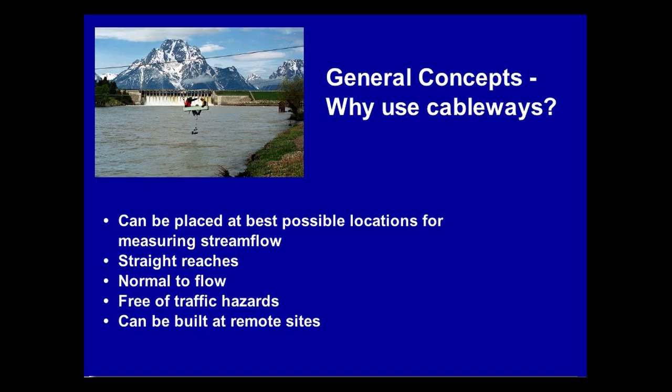The video that follows shows the uniform reach near the cableway on the Swan River near Bigfork, Montana.

The cable provides a track for a car from which hydrographers can make a current meter discharge measurement. The car is released from one end of the cable, and because of the sag in the cable, traverses part way to the other side. The car should slow as it proceeds uphill to the A-frame or anchor on the other side. The video that follows shows what a ride on a cable car is like.

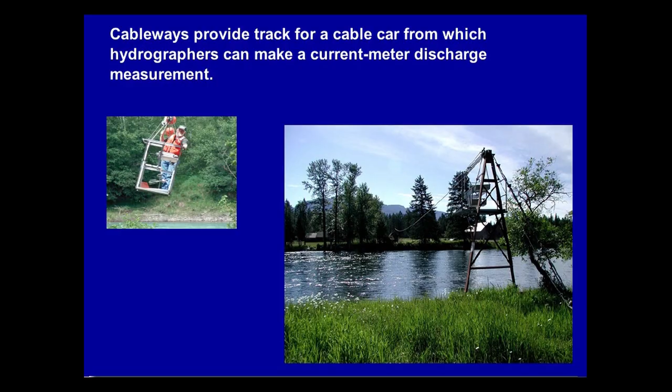Okay, we're about to start our measurement here on the Middle Fork of the Flathead River. Discharge today is going to be around 9,000 CFS. We've got a channel width of about 300 feet. I'm going to go ahead now and release the car, and we'll begin at the left edge of the water.

Two types of cable cars are in general use. Both cars have room for two persons. Stand-up cars are often more practical when spans are long and heavier sounding weights are used.

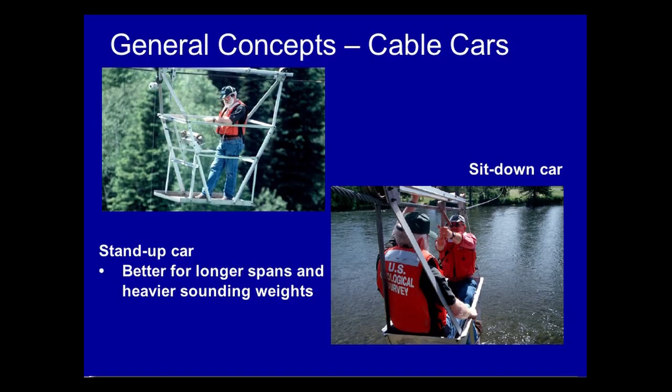Although some cable cars are moved using electric or gasoline motors, most are pulled along the cable using one of several styles of pullers. Pullers must be sized to match the diameter of the cable so they don't slip, and can be removed easily from the cable.

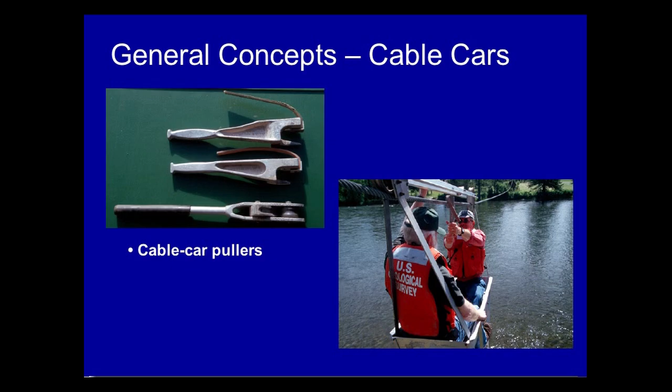The relatively new Sand Point brake, which is an effective way to slow and stop the car, is shown here. Also shown here is a car puller with a leather strap attached. The car can be allowed to slowly roll over this leather strap to stop and hold the car.

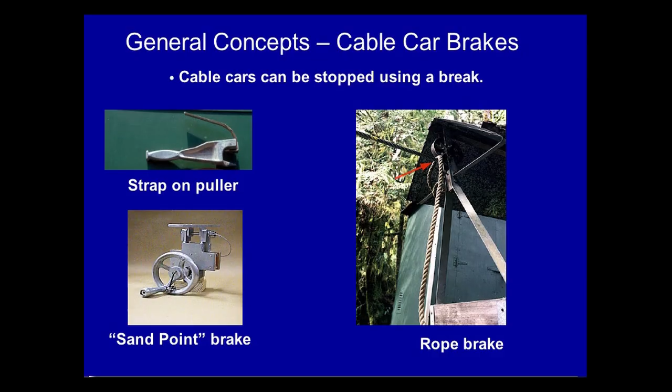The video that follows shows a third type of brake attached to a sit-down cable car. Where none of these systems are available, a rope blocked between a sheave and the cable can be used as a brake. Cable width is measured using marks on the cable.

Cables are usually marked in 5 or 10 foot intervals, with double marks every 50 feet and triple marks every 100 feet. When looking downstream, cables are usually marked starting at the left end of the cableway.

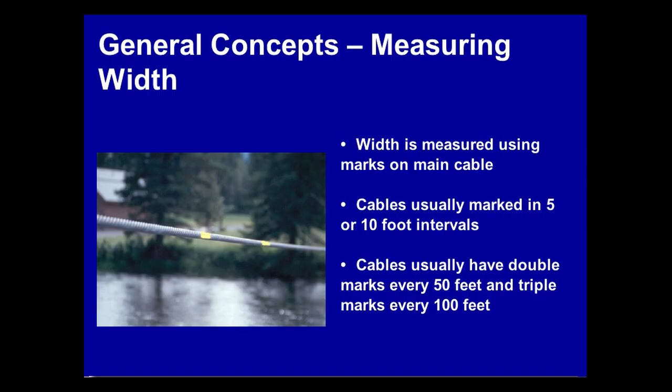You must keep track of the markings as you move across the cable. Marks should be regularly checked by stringing a taut tag line above the cable. Too much sag in the tag line may give incorrect distances between cable markings. The video that follows shows how cable markings are used to determine stationing along a cable.

Okay, we're going to move to our next station along the stream. Generally, this cable is marked in 5 foot intervals. We'll use 5 feet for our next station. We move until the sounding cable is directly under the next 5 foot reading. Set our brake, and we're there.

Now, if you need to get a reading, a lot of cables are only marked at 10 foot intervals. These holes right here are about 5 feet, so if you need to interpolate between, you can use these holes, or this bracket down here if you're coming from the other end. That's going to give you about 5 feet so you can interpolate between 10-foot or even 5-foot marks.

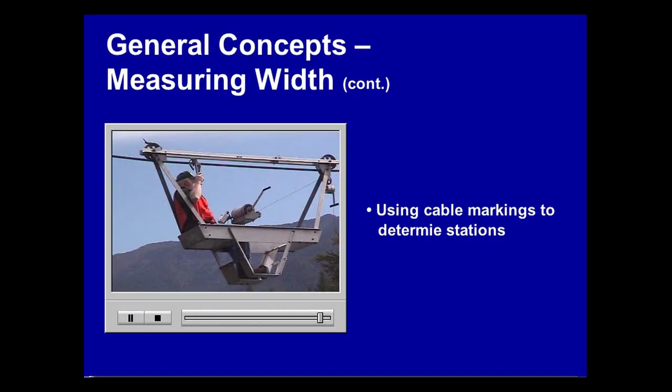Water depth is measured using a sounding cable attached to a reel with a depth indicator. Depth is generally reported to the nearest tenth of a foot.

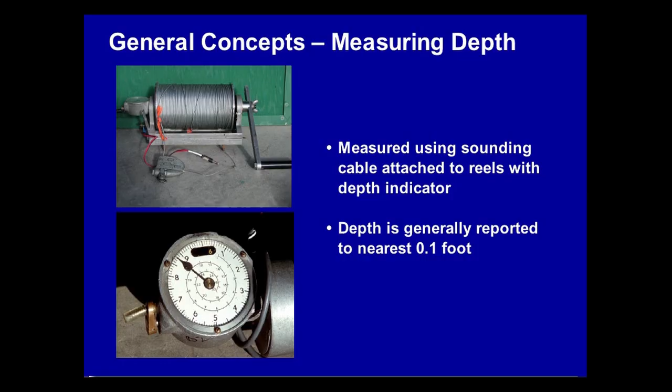Depth is determined by reading the dial on the sounding reel. Depth is usually set to 0 when cups or rotors on the current meter are centered at the water surface. The video that follows shows this procedure.

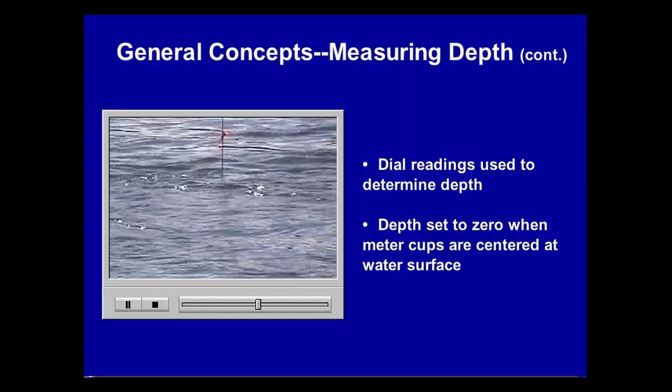Before we take our depth reading, we need to zero the dial on our sounding reel. One way to do that is to center the meter cups at the water surface and set that reading to 0 on the dial, then begin to lower your weight down slowly until you hit the bottom. Once you hit the bottom, take your depth reading on the dial, add the 1 foot for the distance the meter is above the bottom of the weight, and that gives you your total depth.

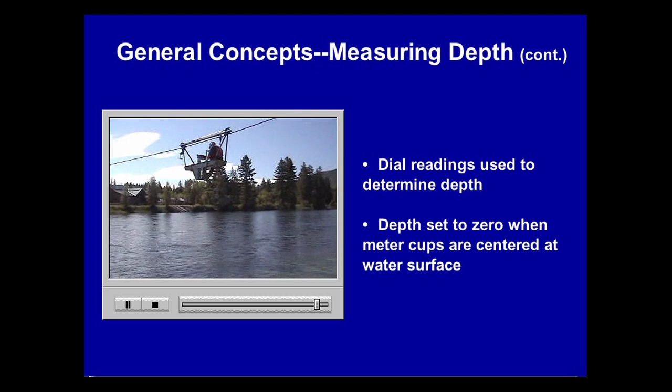You should sound the bottom carefully to avoid incorrect readings. The weight should be lowered gently onto the bottom and not allowed to scour into the stream bed before you read the depth. The video that follows explains these concepts.

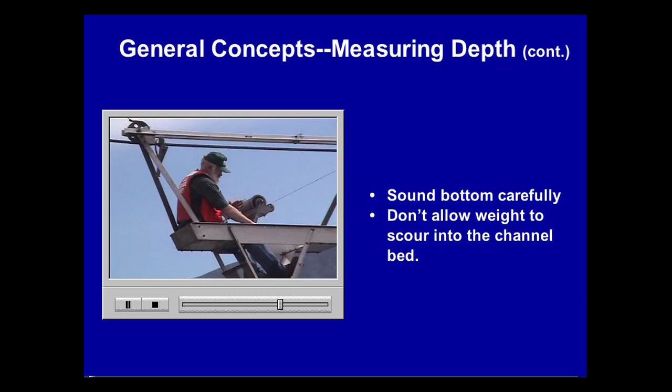Lower the weight until I hit the bottom. Now at this point, I'm showing 3.6 feet. What I want is to take my reading as soon as I feel that bottom. On this stream, it's kind of a luxury, I can test and see where the bottom is because I've got a good hard rocky bottom here. A lot of streams have a soft bottom, especially sand channels, and as soon as you hit that bottom, it's going to start to scour out under that weight. If you hit it too hard or hit it more than once, you're going to get a false reading for your depth. So I get my depth now at 3.6 feet.

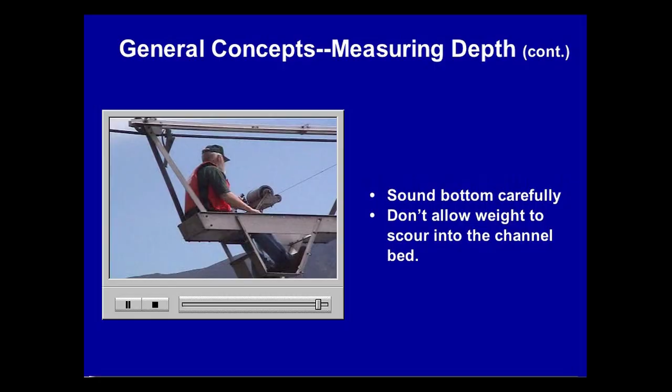A heavy enough weight must be used to ensure that the weight will reach the stream bottom and not be dragged downstream. A rule of thumb is that the weight in pounds should equal the product of the maximum depth in feet times maximum velocity in feet per second.

Despite your best efforts to use proper weights, the sounding line is sometimes dragged downstream when it is lowered into the water. This is more likely to happen in deep, swift rivers. When this occurs, you will have to consider applying a wet line and a dry line correction, because the length of the line let out from the reel will not equal the true depth of flow.

The video that follows shows a weight being dragged slightly downstream.

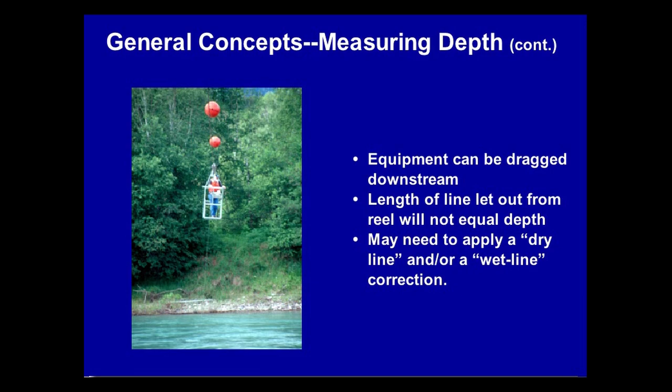You can see as the weight is lowered, it's dragged downstream just a little bit.

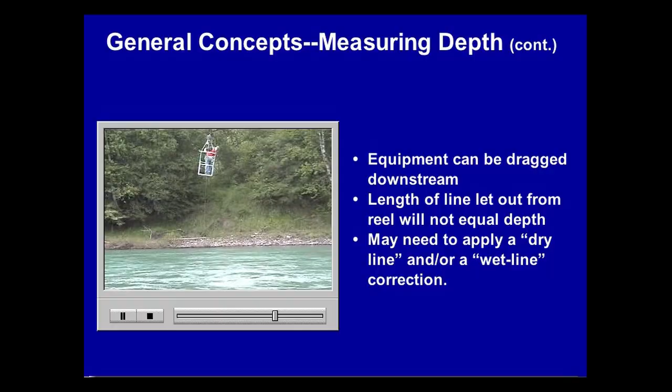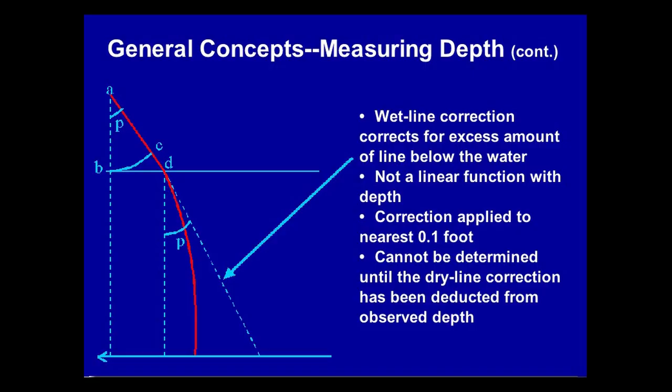A dry line correction is shown in this schematic diagram. It corrects for excess length of line let out from the reel above the water surface. A wet line correction corrects for the excess length of line let out below the water surface. It is a nonlinear function that changes with depth. You cannot apply the wet line correction until the dry line correction has been applied. Both corrections are applied to the nearest tenth of a foot.

To apply either a dry line or wet line correction, you must know the angle the cable makes from vertical. This is determined using a protractor mounted on the cable car. The video that follows discusses measuring this angle.

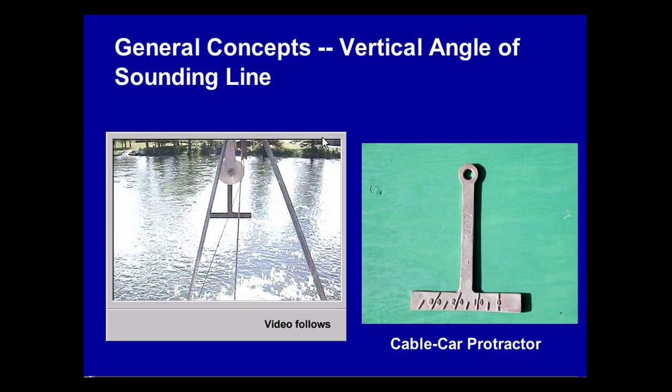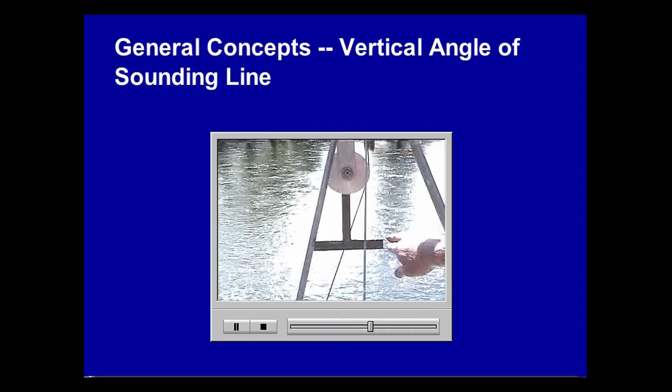Another thing that we need to watch out for is our drag downstream. We use a protractor on the cable car to read the angle and give us our wet line correction. You can see here we're being drawn downstream to an angle of about 20 degrees. We'd look that up on our wet line correction table, and that will give us a correction for the incorrect depth we're getting by going down at an angle.

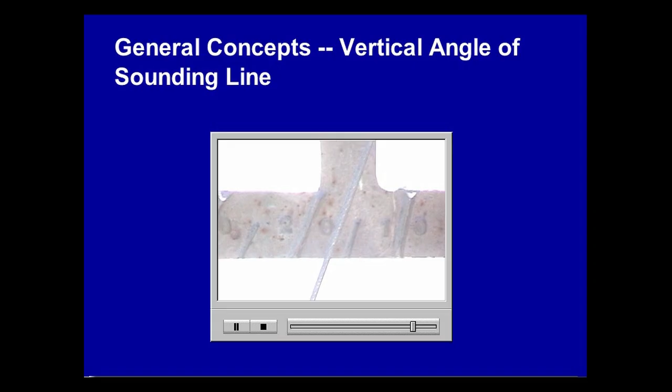You can eliminate the need to apply a dry line correction by placing tags on the sounding line at known distances above the center of the meter cups. The dial on the sounding reel is set when a given tag is centered on the water surface. For example, if a tag is set 2 feet above the meter cups, the dial is set to 2 feet when the tag is centered on the water surface. Tags should be set at distances that will cover the range of depths you expect during the measurement. The video that follows shows tags being used to set depth.

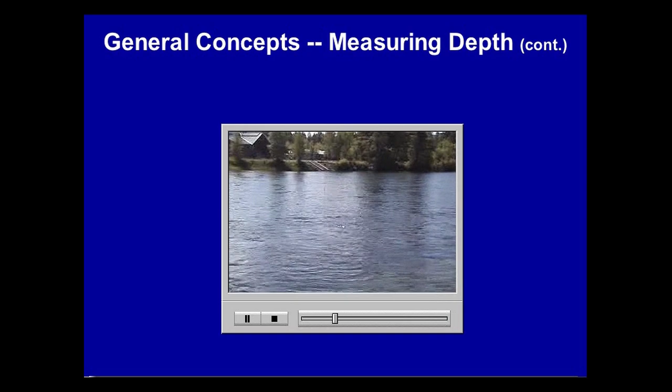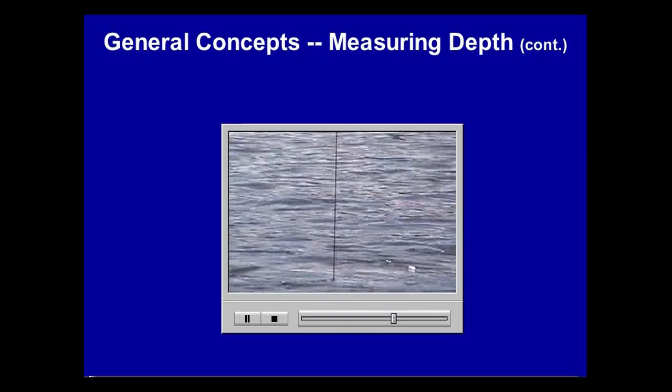Another way to set your depths, which helps eliminate your downstream drag line correction, is to use tags on the sounding line itself. Here we're setting the 2-foot tag on the sounding line at the water surface. We set our dial to read 2 feet. We lower the meter down until we hit the bottom. At that point we're showing 2.9 feet. We know our meter is 1 foot from the bottom, so our total depth is 3.9 feet.

A Price AA current meter is generally used to measure velocity. The meter is attached to the hanger bar. Which hole is used in the hanger bar depends on the weight being used. The video that follows shows a meter and weight being attached to the sounding cable.

Lucky Soltz does not have on a PFD when he retrieves the cable. This is because water on this edge of the stream is only several inches deep. In general, you should have a PFD on when working around a stream.

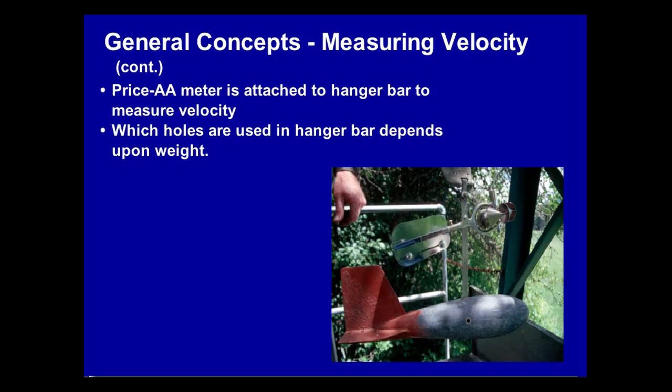Velocity is determined by counting current meter revolutions and using standard rating tables, just as is done when making wading measurements. A Price AA meter usually is used from cableways. The video that follows shows Lucky Soltz measuring velocity from a sit-down car across the Swan River near Bigfork, Montana.

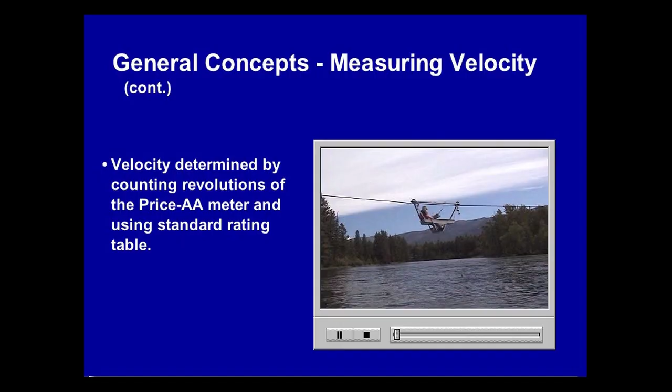Yeah, I got a reading of 64 clicks in 41 seconds.

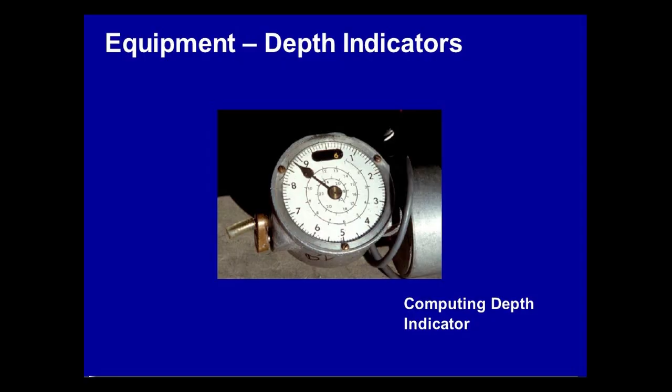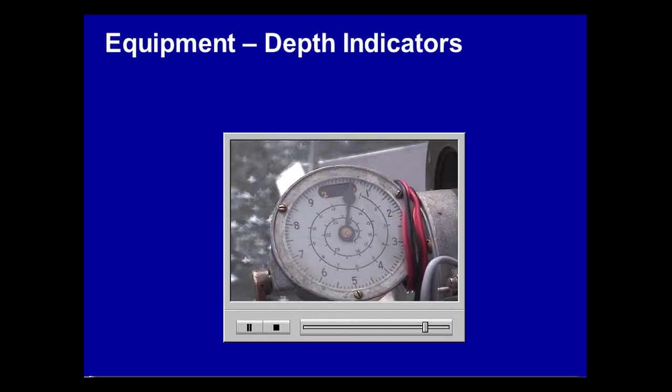The sounding reel is set such that your 0 point is this little logo right here. Anytime your 0 is showing in the little top window, once you've set your reel, as long as that 0 is showing, you're between 0 and 10 feet. When the 1 shows up, then you're between 10 and 20 feet, same way all the way down. Once the 1 is gone, the 2 foot will show up and you'll be in the 20 to 30 foot range.

Most indicators contain a spiral dial, which can be used to determine the location of 8/10 the depth. For example, in this photo, the small number 1 on the spiral dial is located at 8/10 of a foot. If the depth was 1 foot, setting the meter to 8/10 of a foot, the location of the small number 1 on the spiral dial, would be 8/10 the depth. The video that follows shows how the dial is set and how the spiral dial can be used to compute 8/10 the depth.

We've lowered our meter down until the meter cups are now at the water surface. We'll zero our dial and lower the weight until we hit the bottom. As we get close to the bottom, we want to slow down so that we hit the bottom gently and get a good depth reading. The depth is now reading 4 feet. We add the 1 foot that our meter cups are above the bottom of the weight, giving us a 5 foot total depth.

We need to be 2/10 off of the bottom for our 8/10 reading. So we'll now come up 1 foot, but since our meter is already up 1 foot, we don't need to move. We're now going to take our 2/10 from the bottom, 8/10 from the surface reading. You'll notice the spiral dial is now reading 5 feet, which is our total depth. At that point, we'll go ahead and take our 8/10 velocity reading.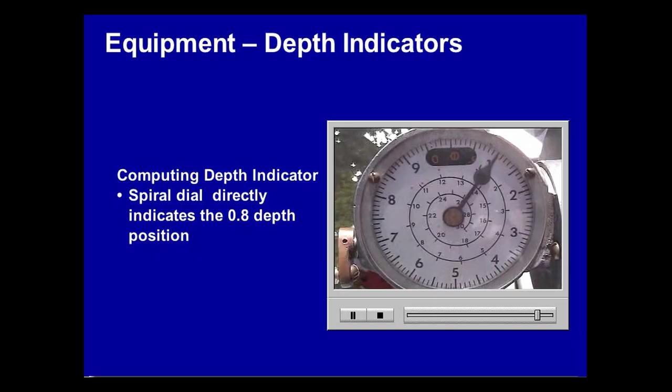Now we need to bring the meter up to the 2/10 depth. 2/10 from the water surface is 1 foot. Since our meter cups are set at the water surface, we come down from the water surface 1 foot to take our 2/10 velocity reading.

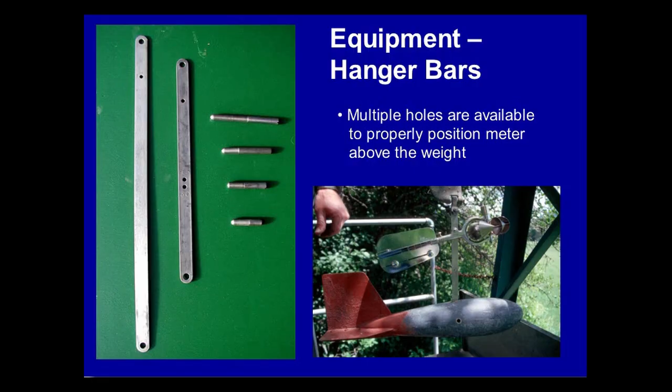Velocity meters and weights are attached to the sounding cable using hanger bars. The two types of bars commonly used by the USGS are shown here. The multiple holes in a smaller bar properly position the meter above the weight. This slide shows how the velocity meter should be attached to the hanger bar given the sounding weight being used.

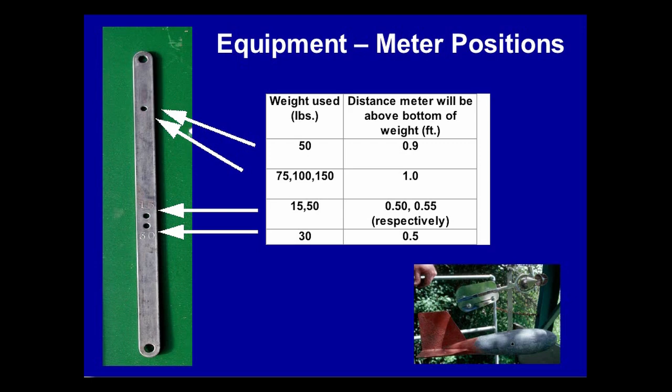You must know how far the meter is above the bottom of the weight because you zero the depth indicator on the sounding reel when the meter cups are at the water surface, or you use tags to set the depth indicator. This means the depth indicator shows the depth of the current meter below the water surface. You must therefore add the distance between the meter and the bottom of the weight to the depth shown on the depth indicator to obtain the total depth. The video that follows, which was shown earlier, shows how total depth is determined.

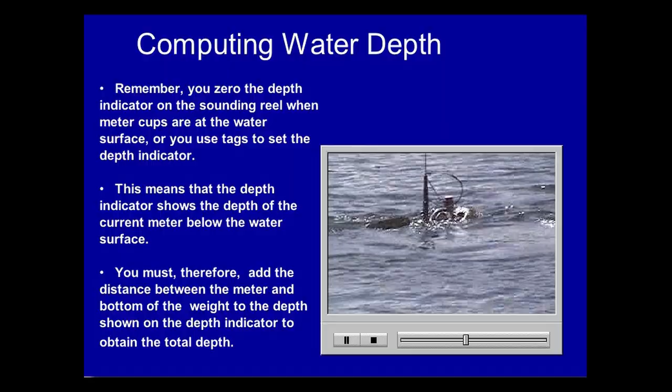Okay, before we take our depth reading, we need to zero the dial on our sounding reel. One way to do that is to center the meter cups at the water surface and set that reading to 0 on the dial, and then begin to lower your weight down slowly until you hit the bottom. Once you hit the bottom, take your depth reading on the dial, add the 1 foot for the distance the meter is above the bottom of the weight, and that'll give you your total depth.

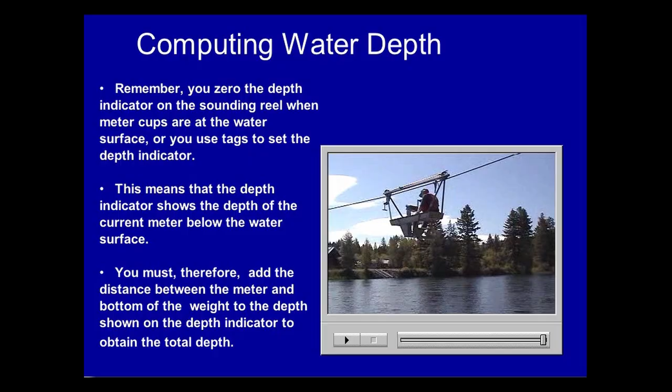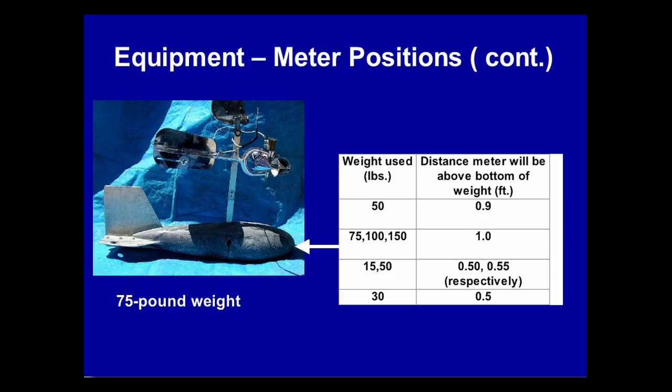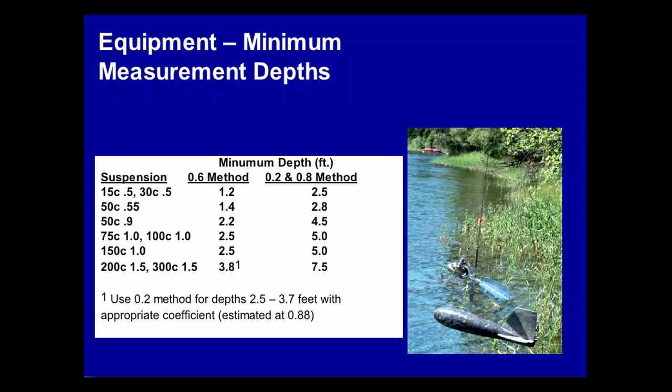The remainder of the class will be used to show how concepts presented in the previous parts of the class were used to make a discharge measurement on the Middle Fork of the Flathead River in Montana. This photo shows an upstream view of the site. The video that follows shows the gauge being inspected prior to the measurement.

Okay, we're at the Middle Fork of the Flathead River near West Glacier, Montana. We're going to make a cableway measurement here today. We've made our pre-measurement inspection. Stage right now is about 5.23 feet. Should give us a discharge of around 9,000 CFS. We've read the outside gauge and the inside gauge, checked our graphic recorder and our satellite platform, and they're all in agreement. We'll come back after we make the measurement and take the readings again and see if there's any change in the stage during the measurement.

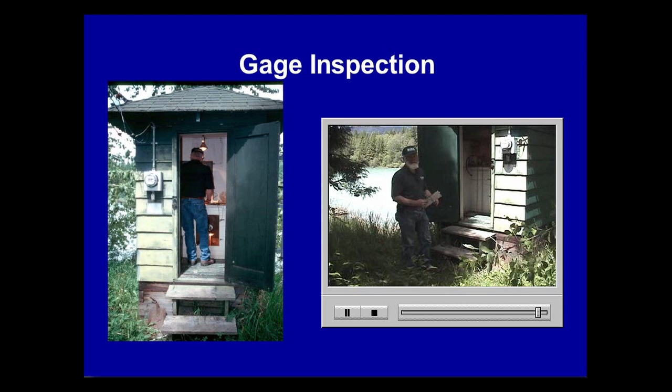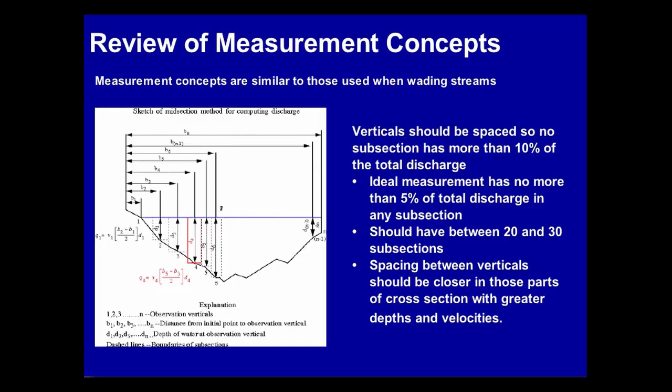As mentioned earlier in the presentation, we will not spend much time on general concepts related to discharge measurements. Those concepts are discussed in other references like the CD-ROM-based report, Measurement of Stream Discharge by Wading, by Nolan and Shields. We will, however, emphasize here that measurements from cableways must sample the cross-section just as completely as measurements made by wading. This slide summarizes general criteria for both types of measurements.

The video that follows shows the start of the measurement.

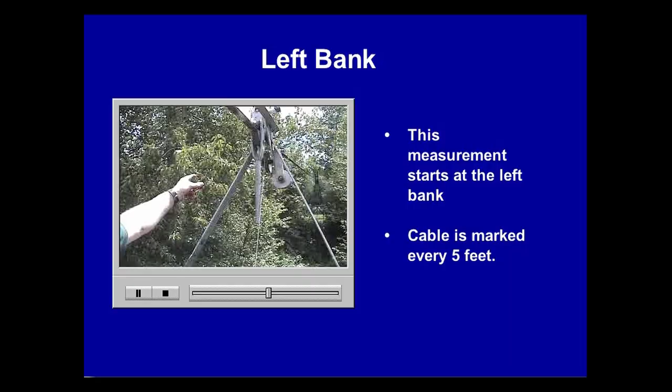Okay, we're at the left edge of the water now. We're going to determine the left edge of the water from the cable markings. The cable's marked every 5 feet. If we count from there, we can see a 50 mark. If we count from there to about 65, our weight is almost at the edge of the water, so we're going to call the edge of the water 65 feet.

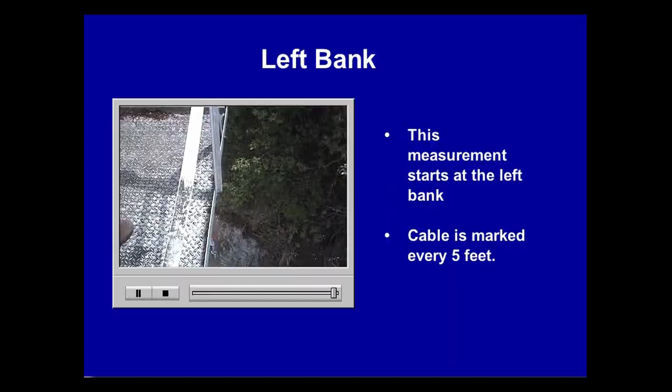The video that follows shows the cable car being positioned to measure depth and velocity at the first measurable subsection.

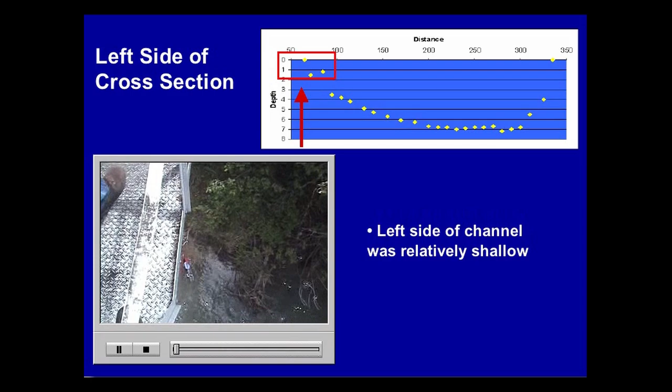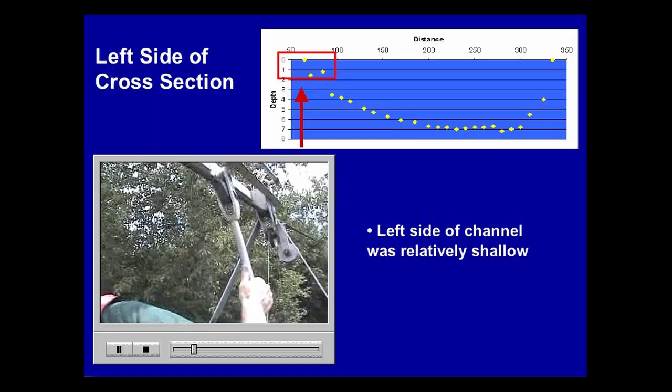We're going to move out to our first station here. Now this particular site, we've got real shallow water. We're not going to get a good reading, we'll just get kind of an attempt at an estimate of what the velocity is and the depth in here. I think we can measure it from the meter cups, the percent of the meter cups.

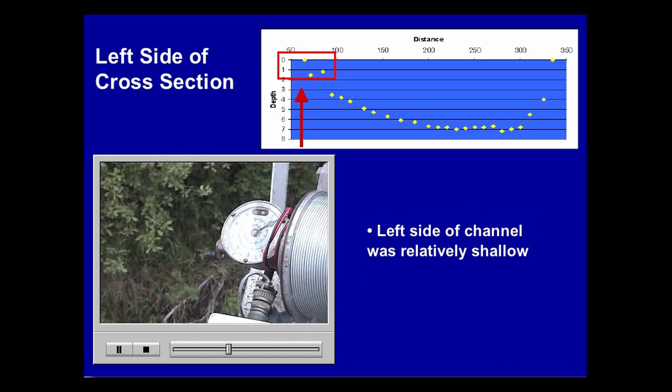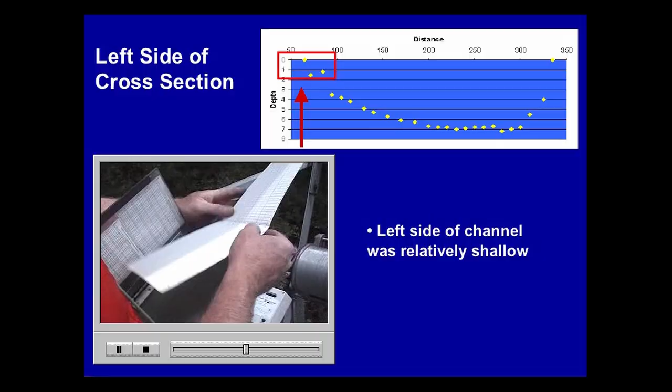Okay, we mark down the left edge of water. Our start time is 13:40. Our start distance was 65 feet at the left edge of the water. Depth was 0. We're now at

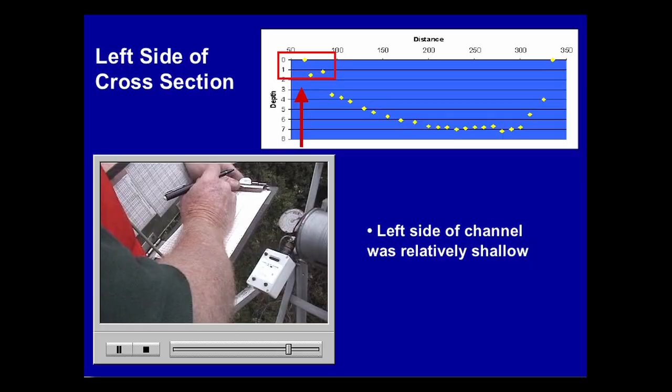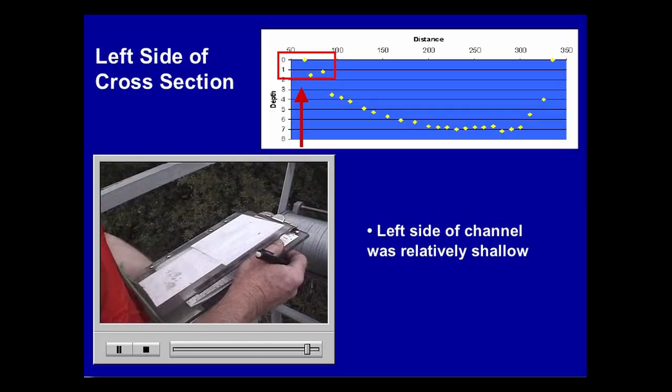72 feet. Depth of 1.5 feet. We had a velocity of 26 and 41.

Depths and velocities to be expected during the measurement were estimated by reviewing previous measurements made at similar stages. Based upon this information, a 75-pound weight was used for the measurement. Actual data from the measurement showed that the maximum depth was 7 feet and that the maximum velocity was 8.5 feet per second. Using the rule of thumb presented earlier, the 75-pound weight chosen for the measurement should have been adequate because the product of the maximum depth and velocity is 59.5.

Despite using a 75-pound weight, the meter assembly was still dragged slightly downstream. You can see this in the video that follows. Using tags prevented the need to apply a dry line correction. The angle was not felt to be severe enough to warrant applying a wet line correction.

Subsections in the middle and on the right side of the channel were deep enough to require measuring velocity at 2/10 and 8/10 the depth. The video that follows discusses one of those subsections.

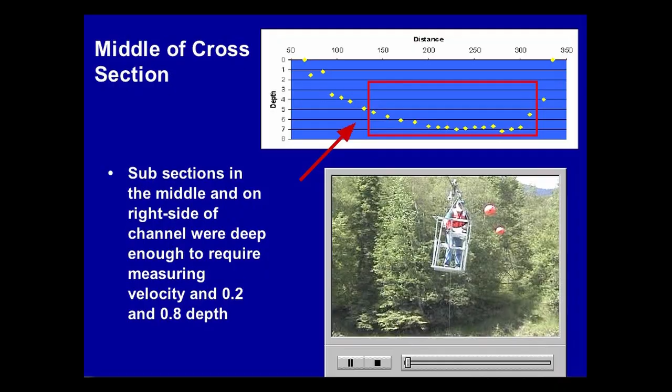Okay, I'm now at 140 feet. I'm going to set my 2-foot tag. Set 2 feet on my dial. Lower it down.

This side I passed 5 feet. I want to check my 5-foot tag and make sure that I don't have too much downstream drag. It looks like 5 feet checks on here, so I go ahead and lower it down.

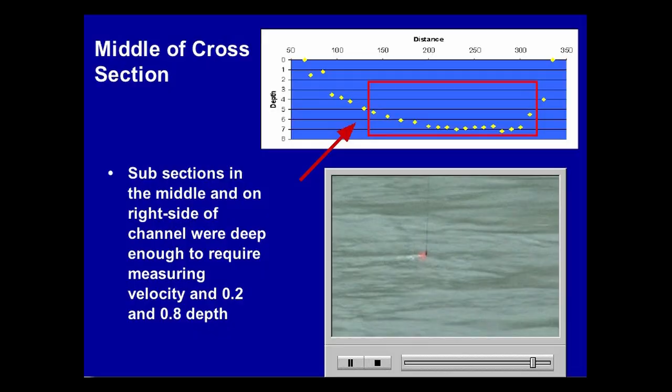The measurement was completed when the right edge of the water was reached. The video that follows shows the right edge of the water and summarizes the measurement.

Okay, we've reached the right edge of the water now. Looks like it's going to be at about 335 feet, so we'll mark that down. Mark down that we're at the right edge of water. And the time, which is 15:20.

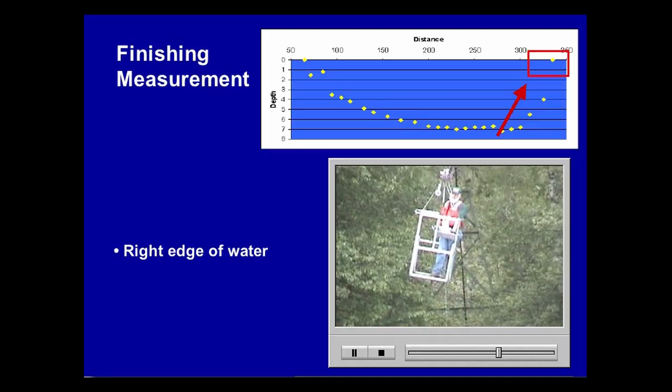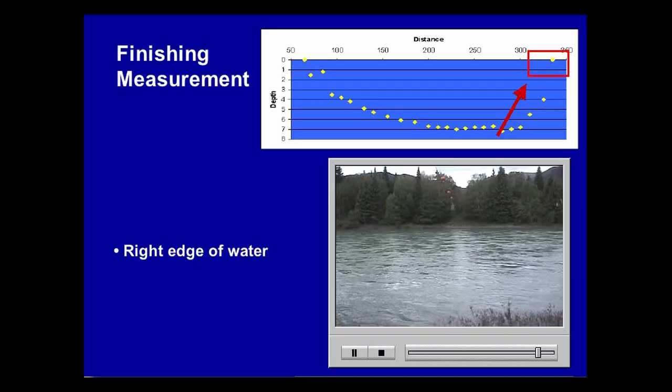We've come about 230 feet, doing 2s and 8s most of the way, mostly with 10-foot sections. The velocities and depths and everything were pretty even, so we're going to call it a good measurement. We're going to finish up now and head back to the left bank and put the cable car away.

The gauge was visited after the measurement was completed. During this visit, all gauges were read, the measurement was computed, and plotted on the stage discharge relation for the site. The measurement plotted within 3% of the rating, therefore a check measurement was not needed.

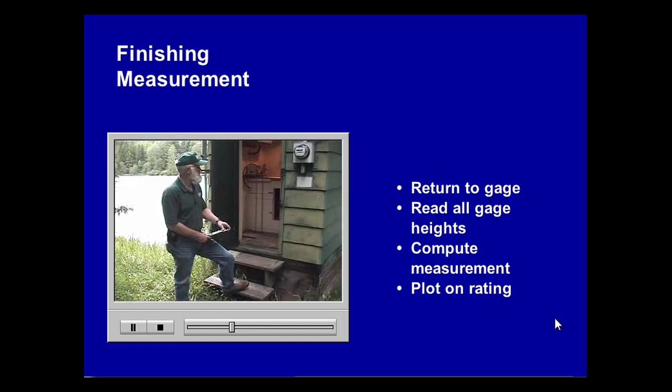Okay, we're back at the gauge house now after completing our discharge measurement at the Cableway about a third of a mile downstream. We've made our final inspection, noted the gauge heights and the gauge height change while we were measuring, computed our measurement and entered it in the gauge house log, and we're done for the day.

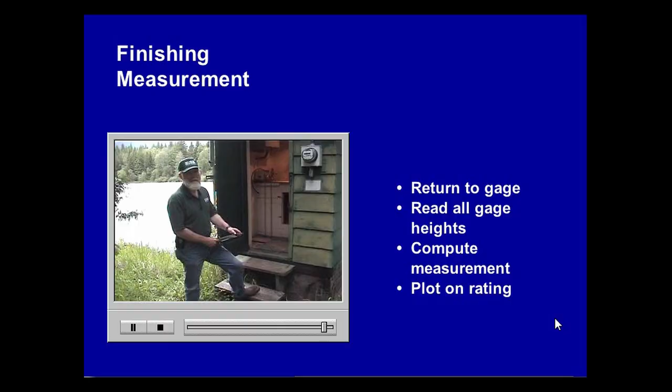WRD Memo 91.42 mandates that all cableways be inspected by a trained inspector every year and the results of those inspections be sent to the regional hydrologist.

WRD Memo 91.42 states that you must perform a visual inspection of the cableway prior to use. While working on cableways, it is often tempting to grab the cable for support. You must resist this temptation at all times. The video that follows emphasizes this point.

Although many job hazard analyses require the use of gloves while working on cableways, this should not be used as justification for grabbing the cable.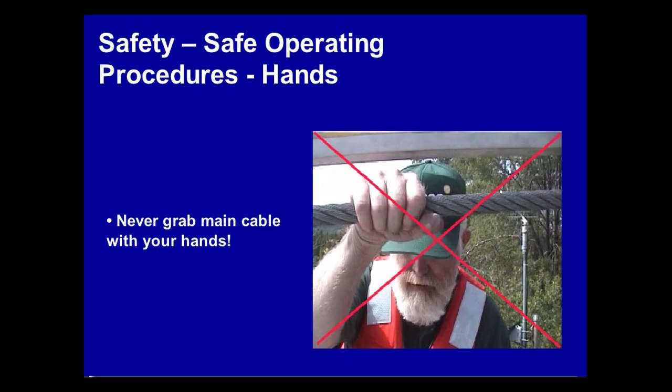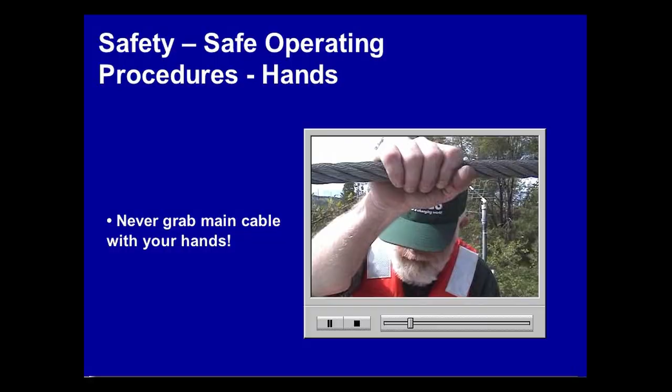One thing you really want to watch out for when you're moving around on the cable, it's really easy to grab hold of the cable and then step on the car when it may not be secured. It's easy for the car to start moving and come right over your hand. In this case we've got a shield, but it will take off a lot of skin when it hits your fingers. Always make sure you have hold of the car itself so that if it moves, you're not going to lose a finger. Try to keep your hands off of the cable at all times.

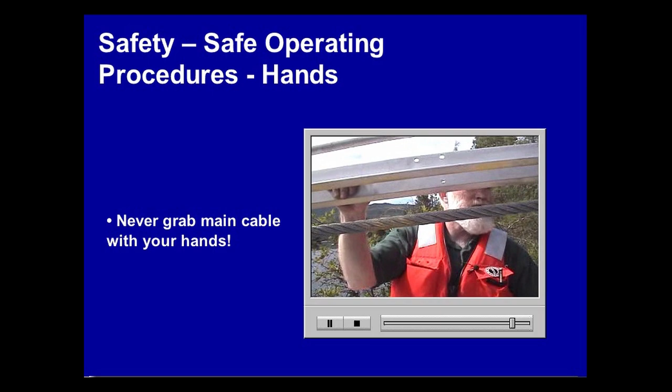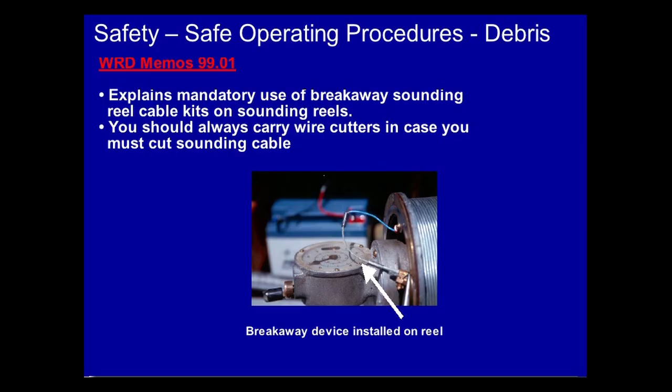WRD Memo 99.01 requires use of breakaway devices that will allow the cable to break free of the reel and cable car should the meter and weight assembly snag debris. The breakaway device is shown in the photo on this slide and discussed in the video that follows. Reels not retrofitted with a drag brake, and APAC reels, are exempt from this requirement.

One thing you always need to watch out for anytime you're making a cableway measurement, but especially in the spring during high water or high flows when the flows are coming up, is debris in the water coming toward you. The thing that'll get you is submerged debris. A lot of times there'll be debris just under the water that you won't see, so you need to bring your meter up every once in a while and check for small debris that might be affecting it.

If you should happen to catch a big piece of debris and it starts pulling your meter downstream, the first thing you want to do is try to release your brake and let the cable out. You should always have a breakaway device on the end of your cable, so when it hits the end, the debris can take the meter and not you downstream.

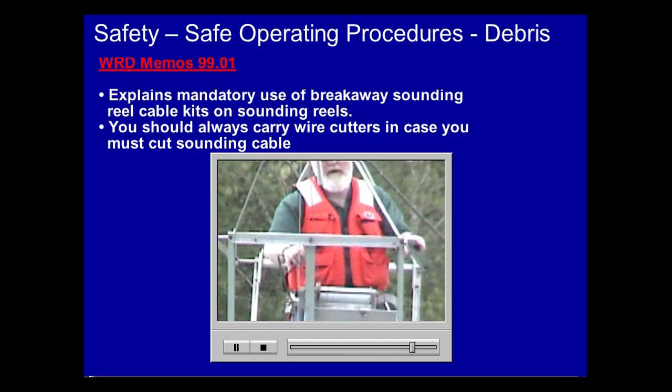The other thing you can do is always carry with you a pair of side cutters or cutters of some sort that you can cut the cable with if you need to. If you can't release the brake, or if you have another problem and need to release the weight before the cable pulls you too far downstream, you can use your cutters to do that.

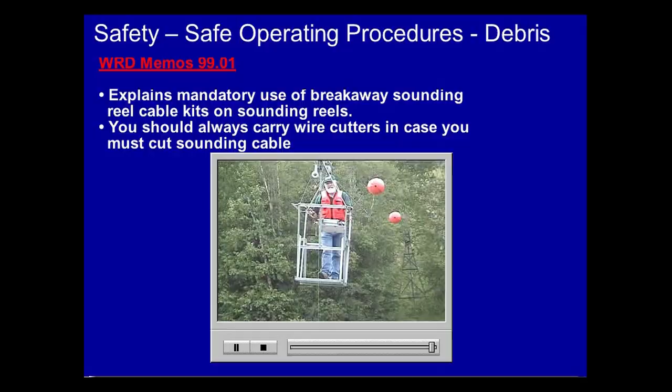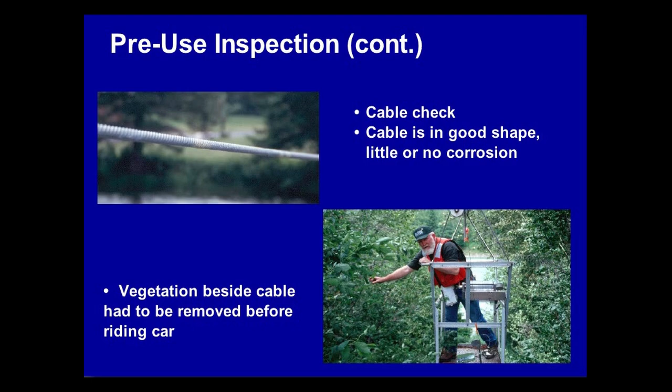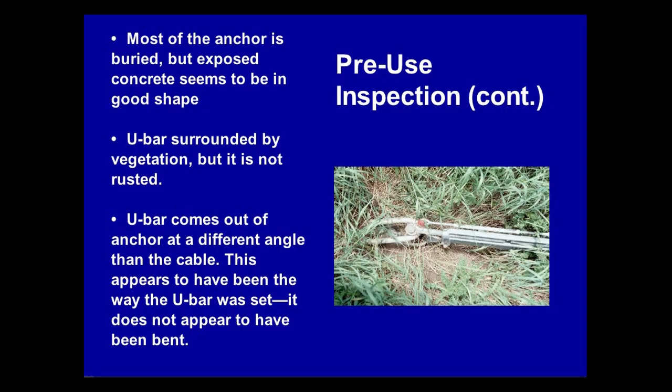The cable was found to be in good shape, except that branches had grown over it. These branches were removed so they would not strike the car and its occupants as the car was released. There was an adequate number of cable clips on the main cable, and they were installed correctly. Although slightly buried, the anchor was found to be in good shape, with text on the slide containing additional information.

Prior to the measurement, you should always do a pre-use inspection. This is the anchor block on the left bank, showing that the concrete is exposed. The U-bar has a little bit of dirt around it, but it's basically in very good shape. The turnbuckle is tight and in good shape.

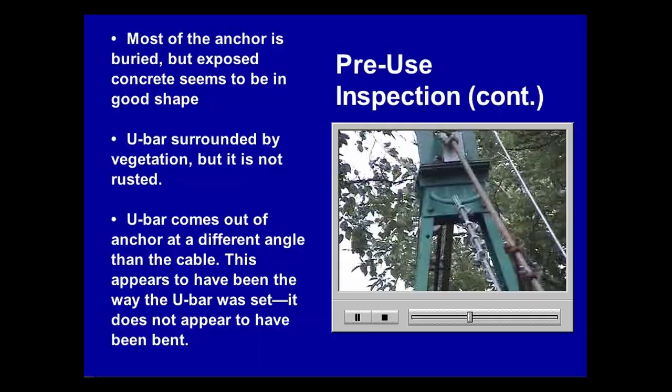There are an adequate number of clips on both the back stay and the main cable, and they're installed correctly. The cable goes over the saddle block correctly, and the saddle block looks like it's in pretty good shape. This cableway has an extra cable for marker balls, strung on top of the main cable.

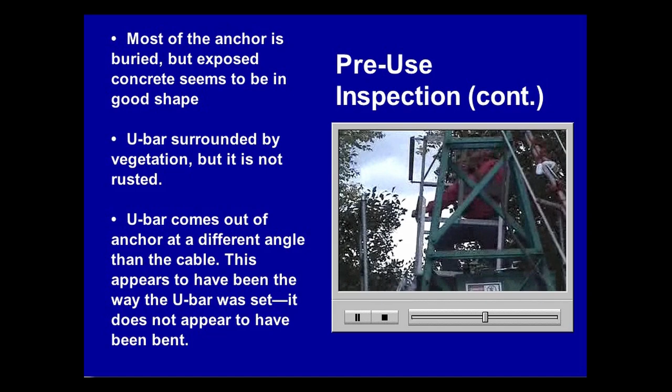The stand-up metal cable car is in good shape and looks like it can bear the load just fine. The A-frame is in good shape. The footing pedestals for the A-frame contain bolts that bolt the A-frame to the pedestal so that it can't be toppled, particularly if the sounding reel becomes snagged and draws the cable downstream.

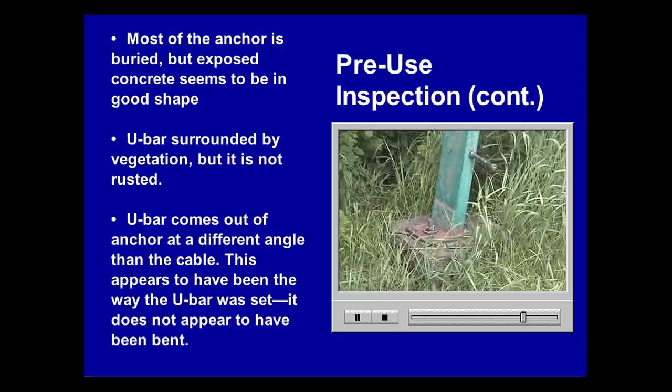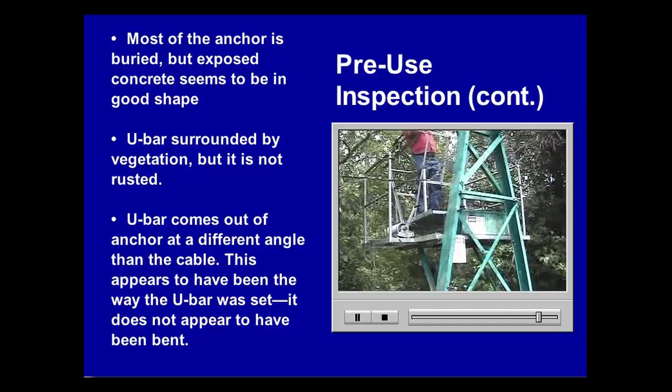The steps were installed every time the hydrographer comes to the site, and they're in good shape. The backstays were found to be tight and were not corroded, and they were secured using an adequate number of cable clips.